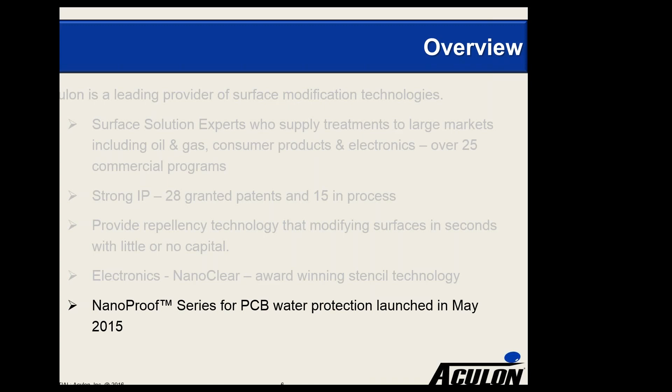But today we're here to talk about the NanoProof series for PCB water protection that we launched back in May of 2015. Let me give you a quick overview of that. The NanoProof series is designed to make printed circuit boards water repellent and to do it in minutes. Clearly the benefits of having water repellent circuit boards are that it will reduce product failure, improve product life, reduce the number of returns. This technology will also allow you to increase yields as it enables rework during the process and will reduce overall cost.

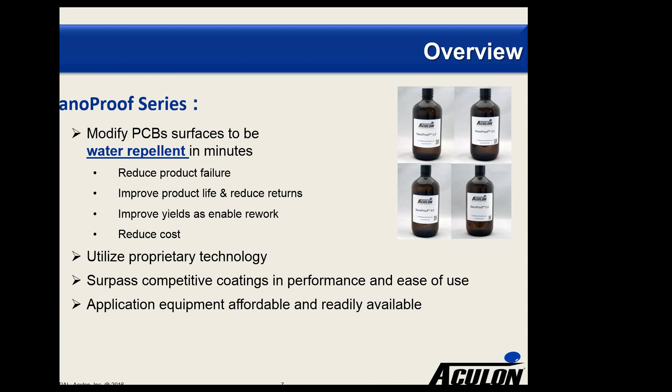It's a proprietary technology that we developed after years of working in the repellency business, and we believe, based on some of the testing that we've seen and some testing I'll share with you today, that it surpasses competitive coatings in terms of performance and ease of use. The application equipment is easily affordable and is readily available.

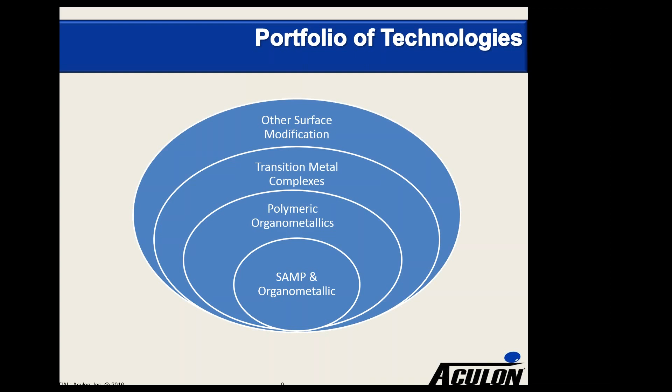So at Aculon, our business is really developing and supplying easy-to-apply surface modification treatments. We do that with a variety of technologies that can be hydrophobic, hydrophilic, oleophobic, and even oleophilic. We're headquartered in San Diego, but we have distribution partners in Asia and in Europe. Our technology revolves around a portfolio of technologies. Initially we started with the self-assembled monolayers and organometallic technology. We added to that polymeric organometallics, transition metal complexes, and other surface modification technologies. The benefit of all that is it gives us a variety of technologies to focus on our surface modification business.

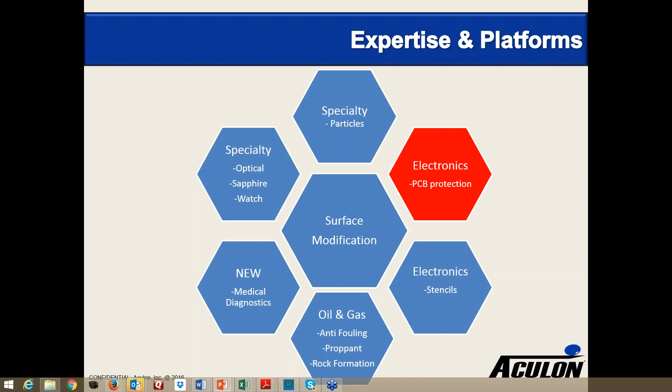Our expertise, taking our surface modification platform, can be used in a variety of industries, including our specialty product business, which is for optical, sapphire, and watches, for specialty particles. In our electronics, we have the PCB protection technology. We have our stencil products. We have our oil and gas anti-fouling, proppant, and rock formation treatment business. And then we have a new area we're focusing on in medical diagnostics. But today let's talk about PCB protection, and we'll talk a bit more about our PCB NanoProof series here.

So why do you need waterproofing? In real life, obviously, PCBs are often damaged by water, whether it's a handheld device that can be dropped into a swimming pool or even a toilet, or whether it's an automotive application or unit that is exposed to the outdoor environment, including rain or humidity, or whether it's household appliances that are exposed to water during operations such as refrigerators and dishwashers, or whether it's equipment used in industrial and medical applications that often get exposed to wet working conditions. These devices can often be damaged with that exposure to water.

Since launching our NanoProof series of products, we've enjoyed a fast start to this and have been qualified in a variety of applications, including mobile device, wearable electronics, exterior smart home electronics, outdoor fitness electronics, and we are working on a variety of other applications and tests, including automotive, appliances and lighting.

So the benefits include, with this series of products, instead of just having one product designed to try to fit all our requirements, we developed a series of products so that you can go from a limited amount of exposure to water, such as humidity or splashing, to full water immersion. The benefits of that, obviously, is if we can protect the PCBs, we can reduce the product returns.

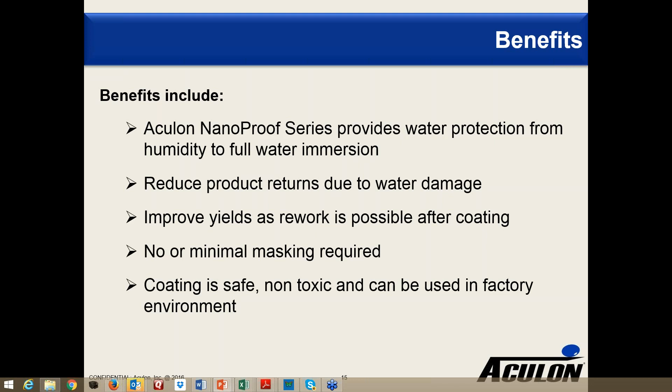So our solutions, using this proprietary technology, will give you a variety of formulations which are economical in cost, and they can be applied using a spray, dip, or dispense methodology, and require a limited amount of equipment, and in all cases we provide a UV tracer. Let me turn to my colleague Eric Hansen to talk a bit about some of the benefits and the features of the NanoProof series.

Okay, thanks, Edward. So, like Edward said, we have a wide variety of different surface treatments, and this is done partly because there's such a wide variety of electronic devices and configurations that customers will also often have a pretty wide variety of things that they want the coating to do.

But in all cases, these materials are meant to be hydrophobic or water repelling, and they have the ability to protect a wide variety of surfaces on PCBs, because you've not only got polymers, you've got a wide variety of different metals and polymers, so it needs to be able to stick to those materials and create the hydrophobicity, which it does. The materials are all really easy to use, which is great. They're easy to rework after coating if there's a mistake.

They have good temperature stability, as well as good dielectric properties. Of course, they would have to. And they tend to be thin and liquid at room temperature. There's no curing reactions or anything like that. So they're quite easy to use. They're really just spray and dry kind of thing, and they'll create hydrophobicity on pretty much every surface we try.

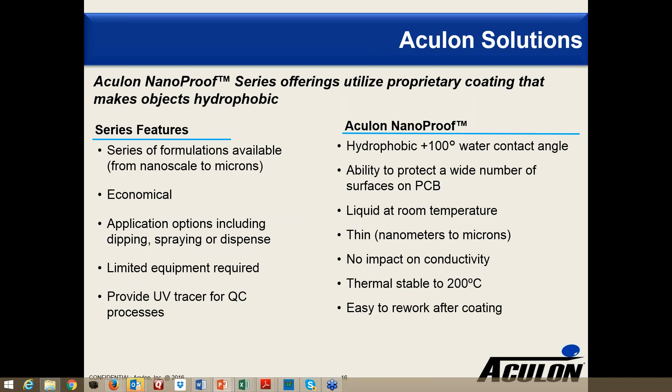So let's talk a little bit about the different products we have in this series. So we have currently about 4 different products. Some of these also have some other formulations which are slight tweaks on solvent. Some customers have very specific requirements on drying time or something like that, and we can help people out if that's what they need by doing solvent swaps. But these are the 4 major ones that we currently are selling.

NanoProof 1.0, 3.5, and 4.0 are similar base chemistries. This is our transition metal complex chemistry that we use. And the general thought here is basically it's like a soft coating even after drying, and this allows push-through conductivity. But the functional groups on this polymer are hydrophobic, and it uses an organometallic agent to bind it to substrates.

NanoProof 1.0 is probably the outlier in terms of thickness. That goes down in very thin coatings, and it's really meant for customers who just want hydrophobicity, just to prevent water ingress through small ports, or if water does get on the board, it slides off, that kind of thing. 3.5 and 4.0 are beefed up in terms of barrier properties, ion migration, that kind of thing. So they tend to be a good bit thicker, 10 to 15 microns or so.

But all three of them allow for push-through conductivity even after drying, which is nice for some customers. NanoProof 5.1 is a bit different chemistry. This one is based upon fluoropolymer chemistry. So like the other three, it's a simple spray and cast kind of film. It just dries in place.

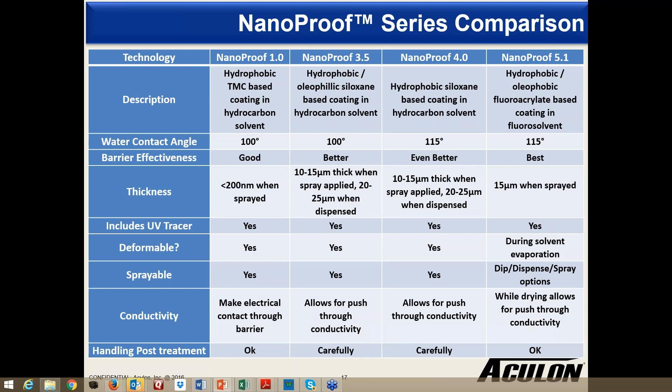And how long does it take for 5.1 to dry? It depends on if it's underneath the chip or something on a flat substrate. It might take about 10 minutes or so. Okay. So you have time. You have some time, yeah.

Okay, and then the application methodologies, you got some choices. Yeah, we heavily recommend spraying. That seems to be applicable to all four. Very easy to work with. I mean, we just have a manual spray here from PVA that works just fine. The process is very fast. It's almost like using spray paint. It's just 5 seconds. The drying time is pretty quick. It can be sped up obviously with warm air or airflow over the part.

If that's necessary. If someone wants a really thick coating, they can just keep applying. They can just apply and dry, that kind of thing, if there's some very sensitive part, a very high power part. We can also do dispensing. That's actually a pretty good way to put it down as well, especially if cost is a concern, that's kind of the most economical way to put these coatings down.

Dipping, some people have done dipping. We don't really recommend it, mainly because dipping tends to put down coatings that are pretty thin. So if you want to put down a thicker barrier, dispensing and spraying usually works better. But some people do dipping and it works fine for them.

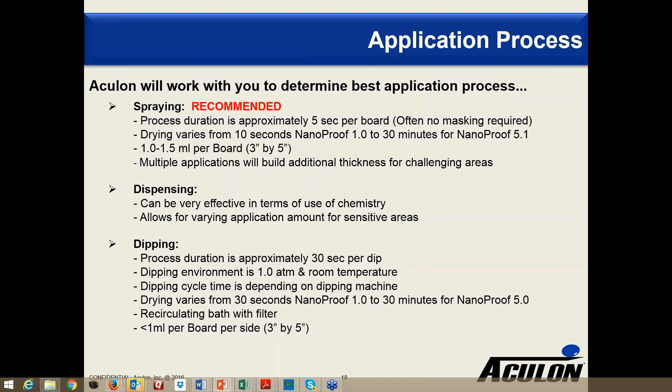Okay. So I know a question that we normally get, and certainly when we were at Productronica in November, people kept asking us how does it compare to conformal coating. So we kind of came up with the top 10 advantages for this technology against conformal coating.

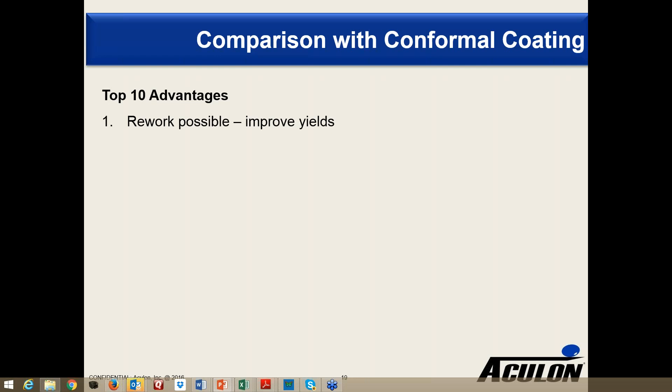So first of all, obviously rework is possible, and it sounds like people who are used to using conformal coatings don't have that opportunity, because when the conformal coating is set, basically it's very hard to scrape off or remove from the board. In this case, as Eric Hansen explained, you can basically wipe this off and remove this coating very easily if you need to rework it. Secondly, no masking is required, so you can even coat batteries, so that is a nice advantage.

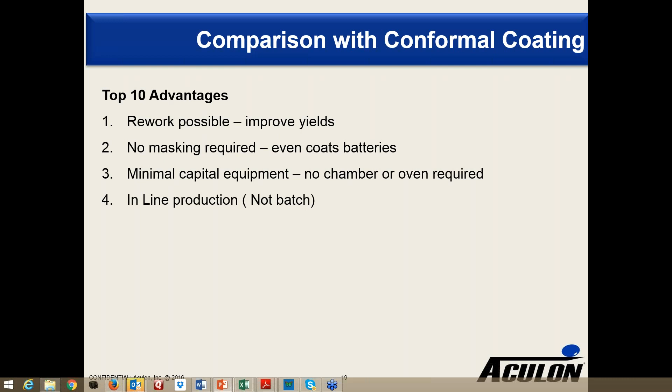The third is the capital equipment, and I'll give you some demonstrations of the types of capital equipment, from a handheld spray all the way up to a fully automated piece of equipment, but no chambers and no curing is required, so that helps out, which also means you can do inline production, so you don't have to put these in a batch type production process such as an oven or a chamber. Fast cycle time, as we discussed, it's in minutes as opposed to 1 to 5 hours of curing and drying. So that'll hopefully improve the productivity of the operation.

The push-through connectivity is great, so it allows you to basically spray the whole board without having to mask certain connections, and then you can push the pins through to connect that board to the rest of the device or the unit. We are flexible in terms of the application methodology, whether it's spray, dispense, or dip. As we've seen with many customers, spray seems to be the best way, not only from a performance standpoint but also from an efficiency standpoint. You can spray the whole board. It's safe, it's non-toxic, and for those of you who struggle with conformal coatings, it is not a conformal coating. So that is great.

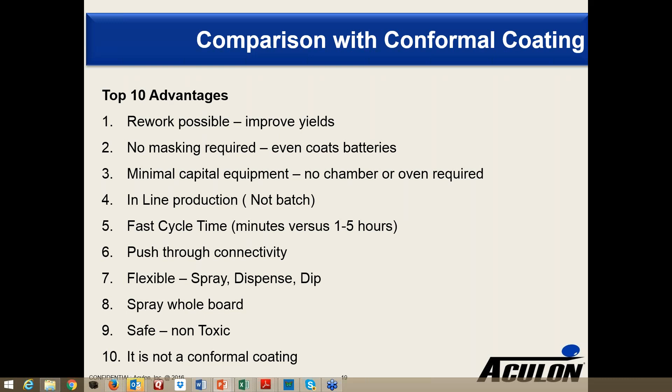And maybe, Eric, you want to take this one, talk a little bit how this compares to Parylene. I know some people in Europe have been experimenting with Parylene coatings over the last 4 or 5 years. Sure, no problem. So Parylene's been around for a while. It's actually pretty cool technology. It uses a vapor phase reaction of an aromatic compound to make a very thin but very dense coating on substrates to protect them from a wide variety of different things, but mainly it's meant for waterproofing electronic devices.

The really biggest difference between Parylene and other solution-based treatments is that Parylene's got to be done in a vacuum, and it's got to be done in batches, and it's pretty slow, and the capital equipment's really expensive. So you're talking about really slow cycle times, and it's great when it works, but you really don't see a lot of penetration of this type of material except for things like hearing aids, just because you can jam a lot of them into a chamber. The part size obviously is limited because you have to do it in a vacuum chamber.

It can't treat batteries. Our types of materials can just be simply sprayed down and dry. It doesn't get really much easier than that. And from the testing that we've seen, the materials that we put down are just as good, and it's a lot easier to use. You can use these on large PCBs, small PCBs, things that are high throughput. If you want to run thousands or even millions of parts, it's not a problem. You just pop them into the little spray booth, spray and you're done. You don't have to build some massive vacuum chamber and spend a lot on capital equipment.

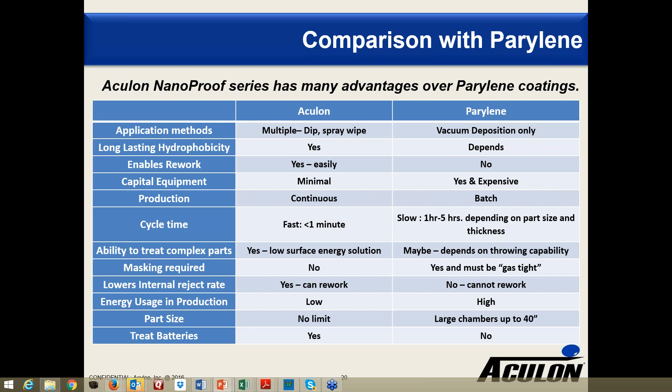So let's talk a little bit about some devices and the coating equipment. This technology has been proven on a series of devices, whether it's mobile devices, wearable devices or even in-home electronics. We found that it's compatible with the key components. In the mobile device space, people often use the IPX series to determine the level of waterproofing they want, and I'll go into that in just a second. We've seen that 3.5, 4.0, 5.1 can deliver IPX7 or beyond, which is 30 minutes of water immersion at a meter.

But I'm going to throw this caveat out there because every device is different. While we've proven this on many devices, your device is probably different, and clearly you need to test it. As engineers, I'm sure that's what you're going to do anyway. But the good news is we think we have some technology here that can deliver some pretty neat performance, and it's been proven that it doesn't impact key components. Whether it's the antenna, the headphone, push buttons, cameras, sealed LCD displays, etc., it's fully functional afterwards. The unsealed LCD display is not.

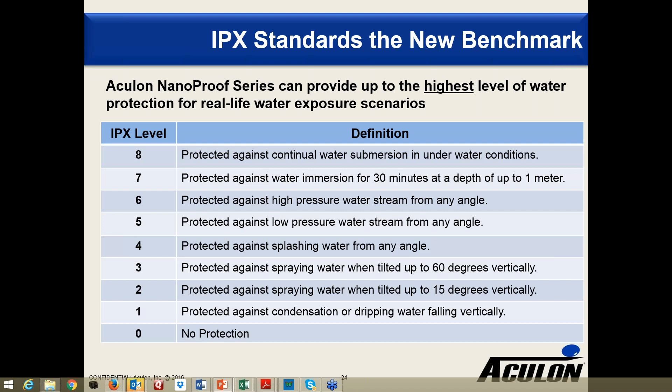And so we've had customers that come to us and they're asking for the higher end treatments. And we say, based on what your requirements are, maybe NanoProof 1.0 works. If you're looking for kind of IPX5 and beyond, then you're looking into one of our more barrier-like type property treatments. So the great thing about this series is it allows you to choose which is better.

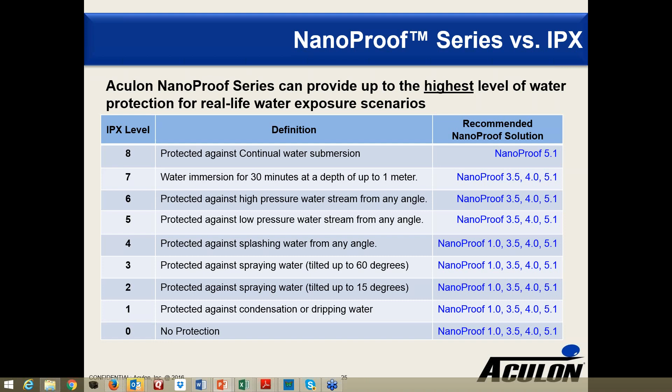We've submerged it in some water. Essentially what you build is an electrochemical cell. And in an untreated or uncoated board, you rapidly get ion transport, corrosion, and then eventually full conduction through water across the comb, and you short out the circuit. So this is meant as a sort of high stress test, and we've run it at various voltages as well as not only water but in salt water, which would be inherently conductive already. In salt water, of course, you're going to get immediate conduction through and immediate shorting out.

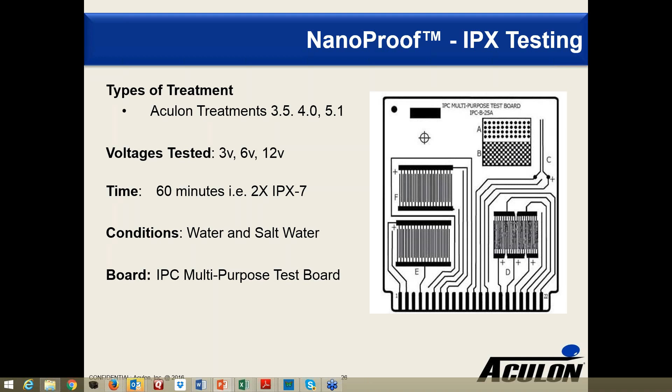So we can go ahead and jump to the results. It takes just 1 second to load. Yeah, it's a pretty big file. Oh, there we go.

Okay, so you can see now. You can see uncoated, obviously, in water. There's a pretty quick current spike, and it's dead. And in all cases, with an uncoated piece, what you'll end up getting is immediate shorting out, and you'll also get, in some cases, corrosion, and then it'll actually become insulating from all the copper oxide that's built up. But all of these, when you take them out of the bath, they're completely destroyed. They're just blue or white or black oxide all over the place.

However, when we have coated boards, you can see the green line there, 4.0 at 12 volts. Basically, nothing has happened. It's just flat lines. There's no current across the gap, and when you pull them out, the boards look clean. So that's a pretty good proof that these materials are protecting versus being powered up in water.

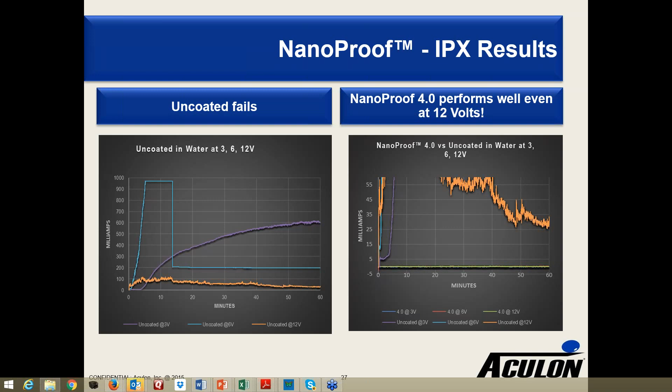But the net of it is, if you look at our series of products, NanoProof 1.0 can basically meet IPX level 4, and then if you're looking for greater barrier properties, we would be recommending a 3.5, 4.0, or 5.1.

Also, as I mentioned earlier on, we have put a UV tracer into all of these products based on customer requests. It can be detected at 365 nanometer UV light, and I'll show you an example of this in the PVA type equipment or spray equipment. You can have this inline inspection as well, so you can ensure that the product is treated.

So, performance considerations when thinking about applying NanoProof, with the general caveat that every device is different and therefore you need to test it. But we've gone through and we've seen no impact on most of the key components.

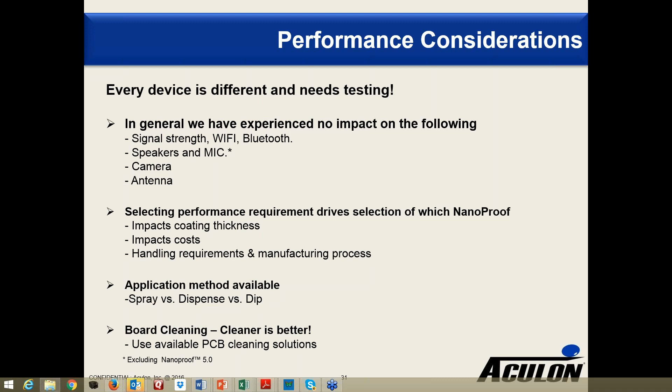And the other thing that we always tell customers is the cleaner the board, the better. There are very good cleaning solutions available from companies like Kyzen and Zestron, etc., for making sure the PCB is clean prior to the treatment. Particularly when you're talking about nanoscale treatments, making sure that surface is clean is very helpful in terms of ensuring the performance.

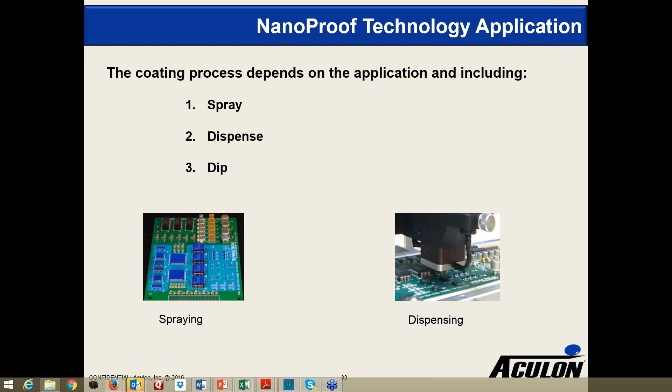Let me talk a little bit about the coating equipment that we have here. So as we said, spray, dispense, or dip are options. We've been working pretty extensively with PVA as a preferred equipment partner. There are obviously alternatives, and people are free to choose whoever they want, but PVA has been very helpful with us, and they're a global company. They have operations around the world, including in Europe, and they just opened up a new technical center in the Netherlands. The standard lead time for equipment is 4 weeks, and if it's a customized piece of equipment, then it's 6 weeks.

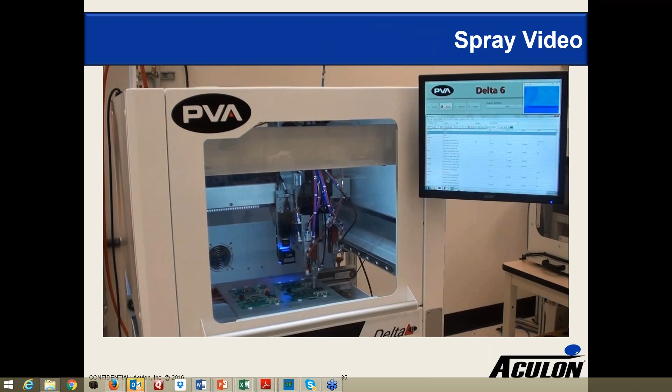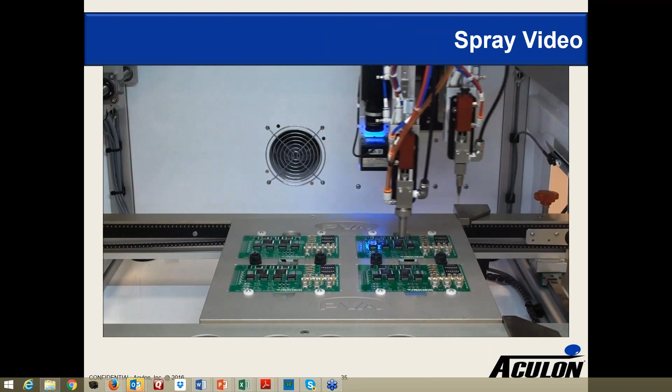Let me give you a quick video. This is the Delta 6 piece of equipment; if you're looking for a relatively automated piece of equipment, it has a feeder that will take the PCBs in and take them out, so this can be done on an inline basis. The nozzle used in this video can be used in a variety of scaled down versions as well, if you're not looking for such an expensive piece of equipment, and this is relatively affordable as well. The nice thing is it'll take 3 to 5 seconds to do one of the PCBs, so it's a pretty easy process for people to use.

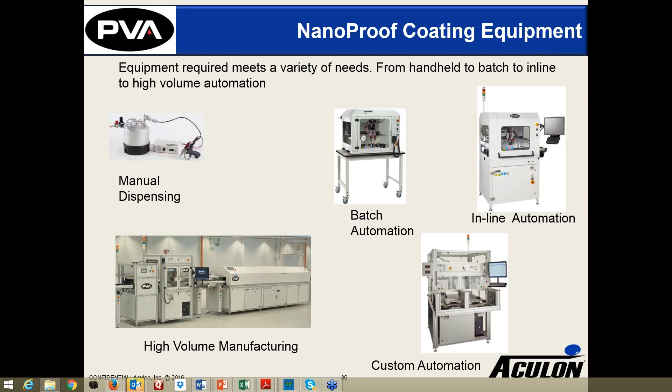And the nice thing is they offer a variety, from literally handheld manual dispensing applications all the way up to higher volume manufacturing with automated feed. They also have UV inspection available as part of the same machine, so you can look at the NanoProof coatings under the black light and detect the presence or absence of a coating if for some reason the programming didn't work. And the same camera can be used for the programming path.

So let me start to wrap this up, and we'll get into some questions. In summary, as you've seen, we're a leading supplier of nanoscale repellency technology. The PCB waterproof technology, the NanoProof series, is designed to provide you options based on your performance requirements, because some people are dealing with humidity and other people want the ability to have full submersion of their printed circuit board.

There are samples available from our website. All our technologies are easy to apply. As you've just seen, the equipment is readily available from a variety of suppliers. And we believe, relative to the costs of conformal coatings or parylene coatings, that we can actually help you save money and give you terrific performance. And we can supply this chemistry throughout Europe.